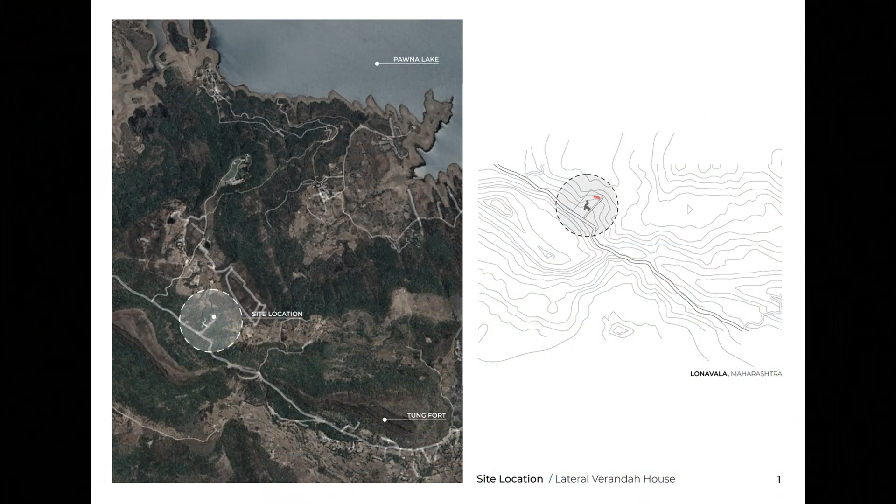Here's a look at the plan.

Everywhere, there are allusions to the surroundings and the past. The cylinder that rises from the landscape as the house is approached speaks of the fort bastions. The organizational structure of the house precludes a discernible entry point or fixed boundaries, the made and found merge. Space and movement flow unhindered, much like an organism that has found its equilibrium in nature, a spatial homeostasis.